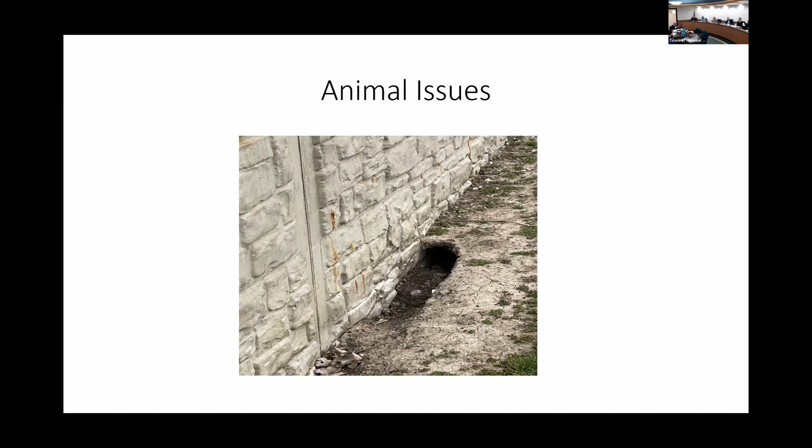The biggest issue here is animal burrowing along the levee. This is just one of many pictures I could have taken—muskrats, moles. So what we need to do is find a company to fill these in, potentially trap some of them, relocate some of them. These walls are driven down 30+ feet in most areas, but over time, if you have some collapses, the whole wall gets exposed. There's our problem person there.

This guy was located off of, that's a muskrat I believe, from all intents and history. So he ends up digging and burrowing down, and then ultimately when the water goes up, his little situation caves in and starts causing deterioration in the levee. This area is right off the Bering Street pump, located just east of Northcott. What you'll see, if you can see the riprap on the right-hand side, that's right where that control structure is.

Unfortunately the Bering Street pump, during high water levels, shoots the water across and erodes the opposite side, which is the Hammond side of the levee. You can see Cabela's in the background. So what we need to do is hard armor that segment so it keeps from deteriorating further. Under high water conditions, you probably couldn't see this—we were very fortunate when we did this inspection. You can see the exposed area more clearly.

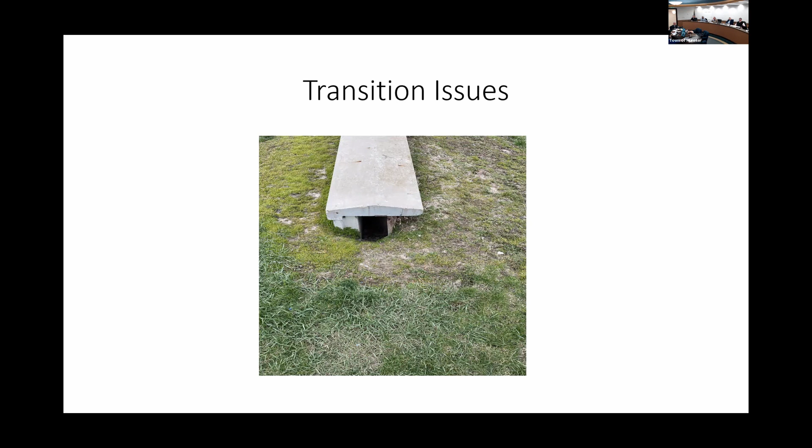Another area we'll address is the transition areas—this is where we go from earthen levee to the sheet pile wall. You can see the sheet pile there a little bit with the cap on top. The earthen levee has settled and gone down a bit, so we need to build that transition up, not only for predator protection but also to help us with maintenance. We've seen a lot more of this year than in previous years, and this is probably the most it's settled.

Stage 7 was particularly identified as an area of trouble. These are the joints—the picture can only do so much, but if you really touch that, it would really fall apart. In stage 7, unlike stage 8, the cap on top of the wall is part of the flood protection, whereas in stage 8 it's considered part of the freeboard, not necessarily part of the protection. So the stage 7 joint failing, and I call it failing, but erosion is more critical.

We've done these in other places, in Gary and in Highland. We didn't anticipate stage 7 to fail this way since it's only 8 years with the joints. So we are going to do that this summer and take care of stage 7, which will just continue on from our 5-2 experiment.

Is that through our contracting or through the Corps? No, this is the original one — we're doing these repairs through us. So all repairs will be through us. Are you doing stage 7 entire, the whole thing? Yes, we're doing all of stage 7.

So stage 7, for everyone who doesn't know, runs from Northcott in Hammond and Munster all the way to Columbia Avenue. This stage is particularly difficult because there's no real access point in and out — it's totally enclosed, unlike other areas where we can get equipment in. This is wall to wall, with a wall running from Northcott all the way to Columbia on both the Hammond and Munster sides. So this is probably one of the more critical ones, one you'll see next month.

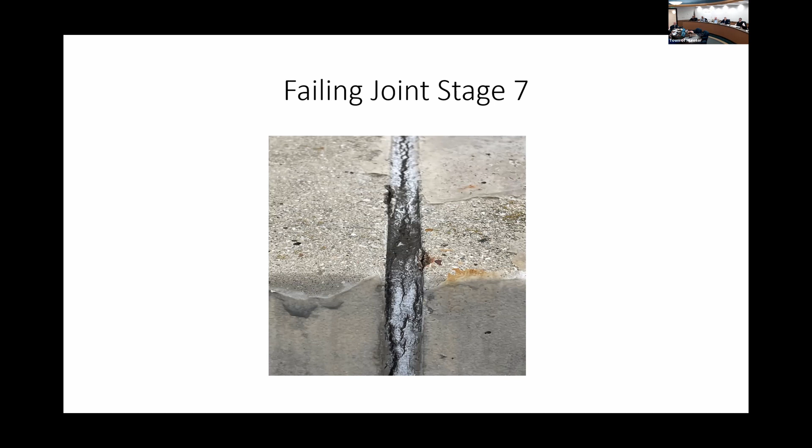So that's the caulk that's failed? Yes. Or we could take it out and test it — you could test it, but we're going to need to come up with an alternative solution, because doing that every 7 years probably isn't going to be very productive.

Once again, this is another settlement situation. You see the brackets there holding up the decorative wall. There's still sheet pile behind that wall, so it's not directly exposed to the river, but it's something you don't want left exposed. Once again, it's an issue of getting a landscaper or someone with a truck to fill that in so it speeds up and you don't see those brackets.

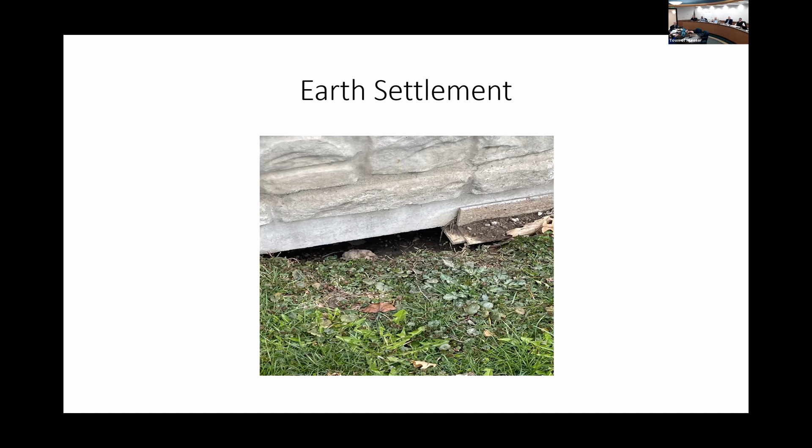And that's part of the problem — this is on the Hammond side, more by the industrial park. We believe it may have been somewhat due to when the young man went missing over there; there were a lot of vehicles up on top. This is an area where we don't normally have vehicles, that's why it's not paved. It's a very remote area and we didn't want vehicles up there, but it seems during that time there may have been more vehicles than we wanted, and over the winter it softened up. But we just need to fill that in, plant seed on it, and we should be in good shape. This is the first time this has ever reared its head.

We're going to get draft copies of all the inspections we did — next week you guys will be able to see them. But I wanted to show you just a sampling of what's out there and what we saw last week.

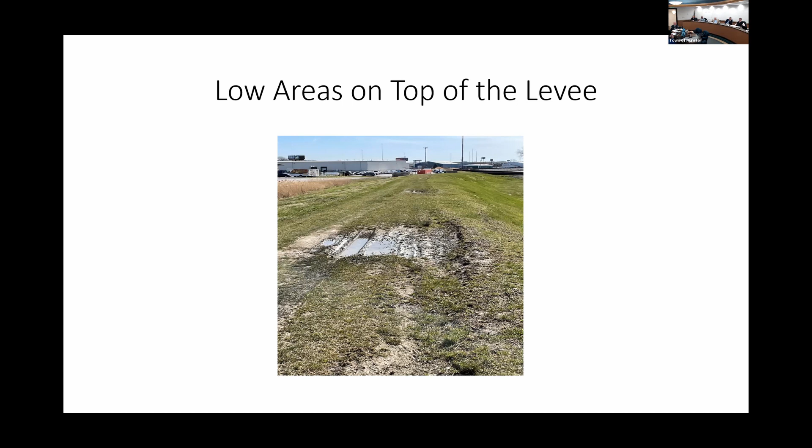And that is it — I don't want to go to that one yet, because that's for the next presentation. Sorry, not too far.

Quick question — was that the Bearing Street pump? Yeah, on the Bearing Street pump. Is that a variable speed pump? I was expecting the line to jump all over this one. You said the pump was shooting out water and it's actually eroding the other side of the bank — that's correct. I mean, that's a lot of force. Can we throttle the pump down?

That drains all of the Wicker Park Estates subdivision, so it's either on or off — when it's on, it's on, just assume it's constant speed. It's a lot of water, and I'll tell you, during a high flow condition you can hear it pump, but you can't see it visibly above ground. There has to be something going on for it to constantly erode, and it's too far away from the diverter structure for the vortexes coming out to be causing the erosion.

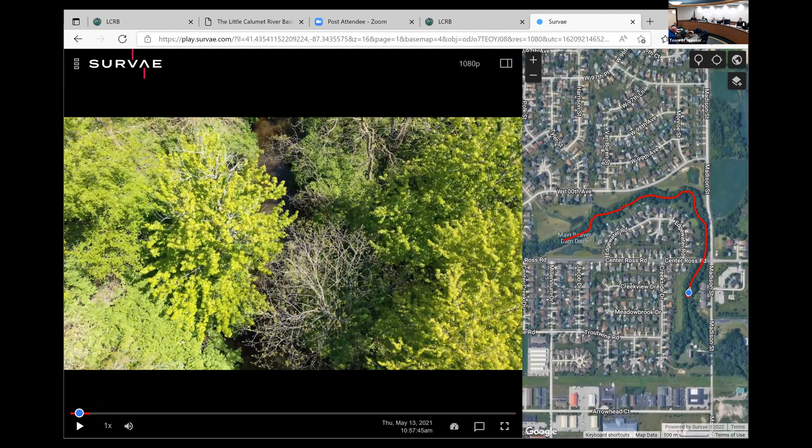Is there enough water there, Bill, for you to be able to get somebody on the water, like in a canoe? Or is this all just computer tech? The modeling is all computer, but the data collection, I think, is mostly going to be on the ground, on the shore, alongside, taking the pictures, taking the measurements.

But you're going to get depths and kind of where the water is supposed to go. The community should have some of that. The premise and the whole thought process with this particular project was to get a cumulative or holistic overview of that entire watershed, so as new construction comes up, the impact would happen, because all the water we're talking about, it'd be nice to see that aerial again.

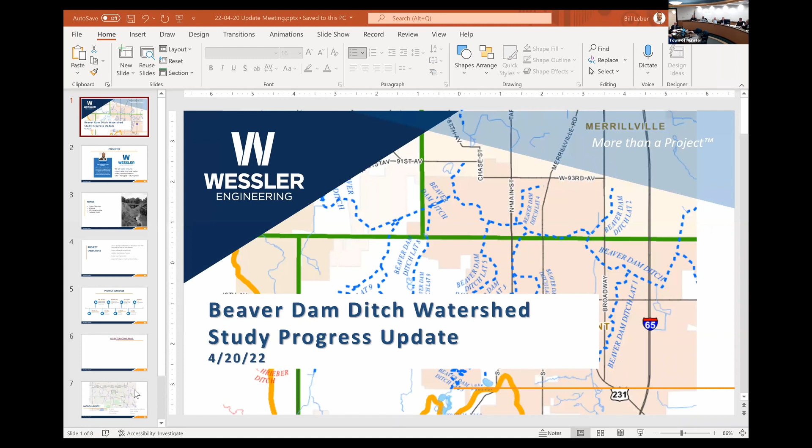All that water, when it's done working through this particular part of the county, goes under I-65 and eventually ends up in downtown Hobart. So this is part of our overall goal of trying to connect all these different portions of the watershed, so one impact in one community doesn't have an adverse effect on other communities. So we have to have some understanding.

It's always been, for me personally, about what's and how much water is going in under I-65 at that one juncture. And all that's happening west of there is construction, and the old stuff isn't getting moved. So we're trying to get ahead of things we're seeing in Hart Ditch, where the volume is so much now after all the development, you have sheer walls in people's backyards.

Right, and that's why it was really important to us that this comprehensive model is both hydrologic and hydraulic. What you've kind of seen in the past, if you're looking at the DNR flood models, those are hydraulic models.

Those are giving you flood stages based on a point in time and a certain flow. Can you explain the difference between hydrologic and hydraulic for us mere mortals who aren't water resource engineers?

So hydraulic is basically just looking at the channel capacity, and if it's at a set flow, what's the elevation in the channel. Usually that's what comes up when there's construction - if we impact the channel and work inside the floodplain, we're changing the cross section, so does that adjust the elevation? That's very important. The difference is we're not just looking at the geometry of the section and the channel, but also the amount of runoff.

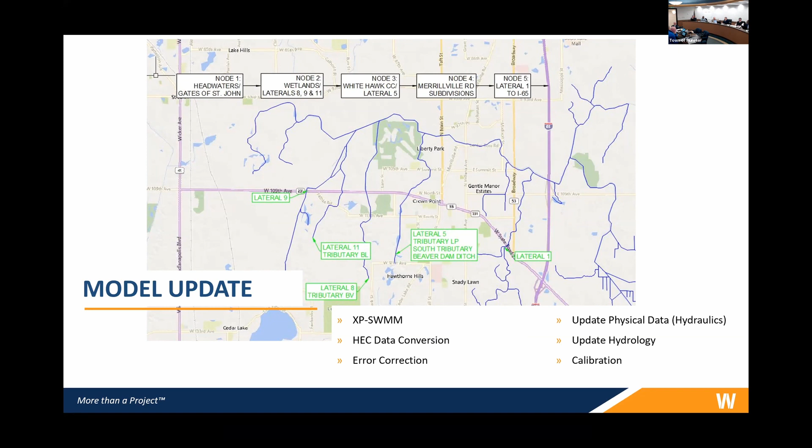Okay, thank you. Thanks. Anybody else? Going once, going twice. Thank you very much.

Next up, I'm going to change things up. Is anybody here from the city of Hobart? Could you do a presentation regarding the interlocal agreement on Stinky Creek, Turkey Creek, Lateral 6, the Region Regional Stormwater Watershed Project?

Holy cow, do you start every meeting like that? With that whole name? We try to. State your name and address, sir, please.

Phil Graylick, City Engineer of Hobart. Our address is 414 Main Street, Hobart, Indiana. Thank you.

Please tell us what you're recommending with regards to what we had already approved. I think there was 400 and some change as it relates to that job. So it's my understanding you're looking to have some modifications to what was originally discussed.

Right, we had applied a couple of years ago for what we saw as our solution to the Stinky Creek problem, which was basically to enclose it in a pipe and alleviate the flooding within Hobart. We hired Abonmarche and Christopher Burke to design that.

In the early preliminary phases, they came up with the idea of taking it to the north, and we came back and asked the commission to consider funding the design of both the Turkey Creek Lateral 6, which is the blue line on the handout, and the Stinky Creek line, which is the black line. The commission said no to the Turkey Creek Lateral 6, but agreed to fund the engineering, partnering with us for the interceptor sewer on Stinky Creek itself.

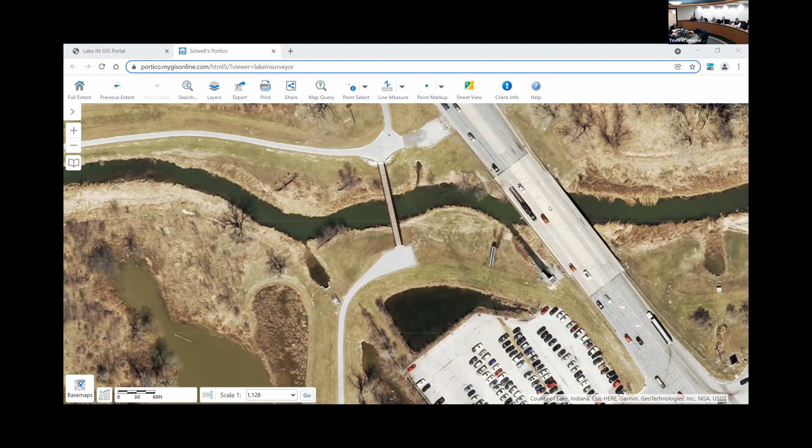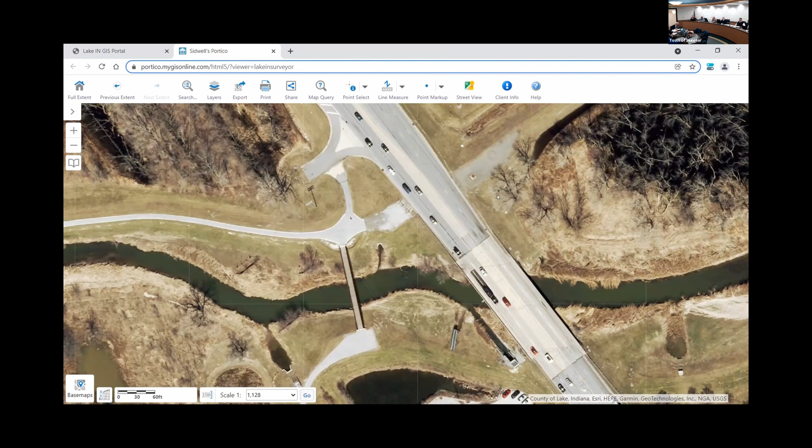Mr. Repay: I'll start off with this and then I have pictures that are better. This is the aerial view. Indianapolis Boulevard is on your right. This project consists of two things, separate but in the same area. One is to improve the gates in the area. As I told you in the inspection, the gate that failed is right here. There's the truck stop over here. This is technically Highland. This gate is built basically at ground level, much different than all the other gates. You'll see what a typical gate looks like in this system in my pictures, but first an overview. This is the outfall from the INDOT pump station located here, which will prove important later.

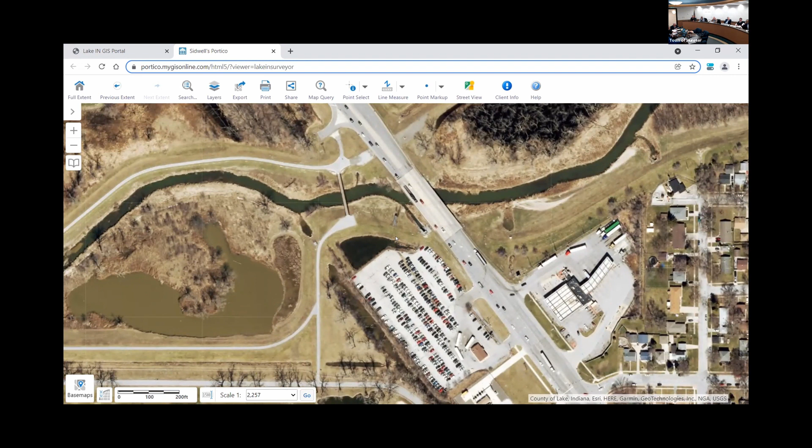This is a green pond I get told about every summer when it turns green because there's no water flow. This pond was designed to drain this parking lot and ultimately drain through this area. The problem is there's not enough flow in this area to push the gate open, and this is the plank. Those who have been around know the secondary closure at this area requires us to go out on this plank and drop sandbags down to prevent water from backflowing, so it doesn't flood in this area.

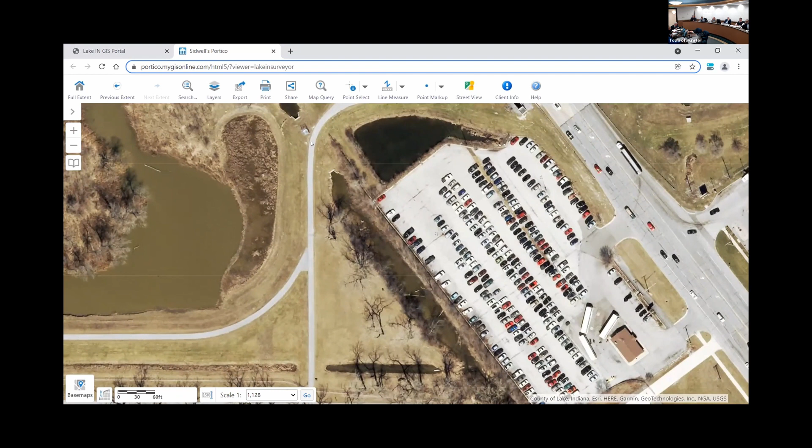That's another component. The second component is this gate, a typical gate, you'll see a better picture later. It's supposed to drain this little drainage stream, lack of a better word. Once again, not enough pressure to push this gate open. You can already start seeing the sediment filling in this channel. Ultimately all this water makes it anyway to the inlet of the INDOT station.

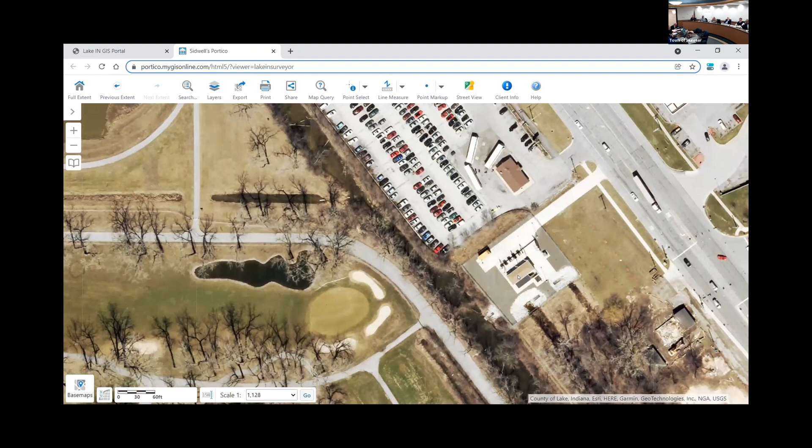So this contract will address those issues as well as the issue with the pump that Wicker Park puts here to pump water off the golf course during high flood rain events, which it's designed to do. It's supposed to take the water, but during times when we need the water off and don't need the storage anymore, they pull off this old 1900s pump and it pumps it back into this ditch that ultimately feeds into the INDOT pump station. United did the pump station, they know the amount of capacity available, and that's why we chose them.

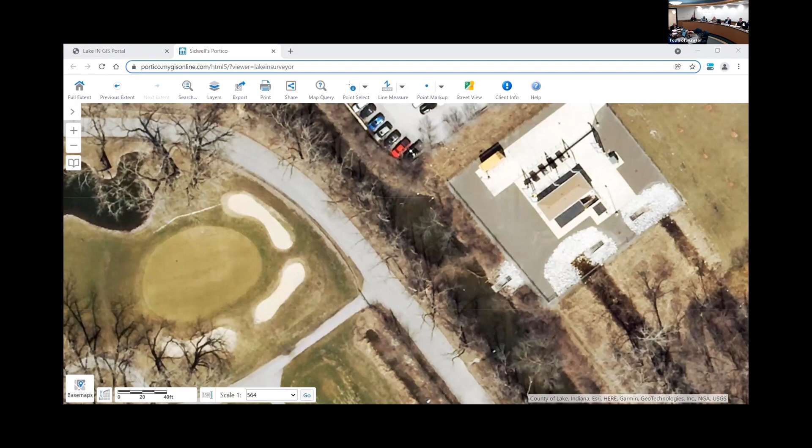Oh, I gotta get out and stop sharing and share. Sorry Bill, I'm gonna get to it. Darn it, yeah, you're laughing. I get it, what do you got?

Mrs. Lambert, can we send you to like a seminar to maybe assist in this type of endeavor since this has been a consistent thing? I think we can do that. I'm under a lot of pressure. I know, and we can't expect you to do everything, inspections and all this, and the screen sharing too. I couldn't do it. So here's.

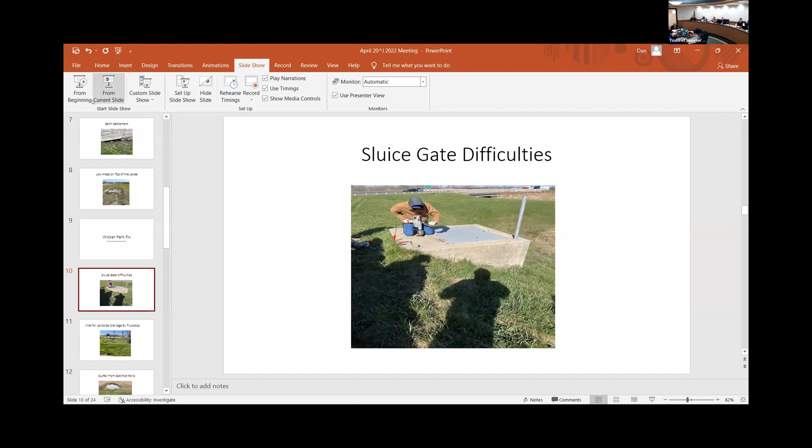I'll just zip through here because you've already seen these. So here are the gates that I spoke about. This is the gate that you saw the aerial, that is ground level, the one that failed this year.

They're going to extend this above ground so that you use the tripod, we are at ground level or above ground level where we don't have to have people doing this type of work. There are only two others consistent with this.

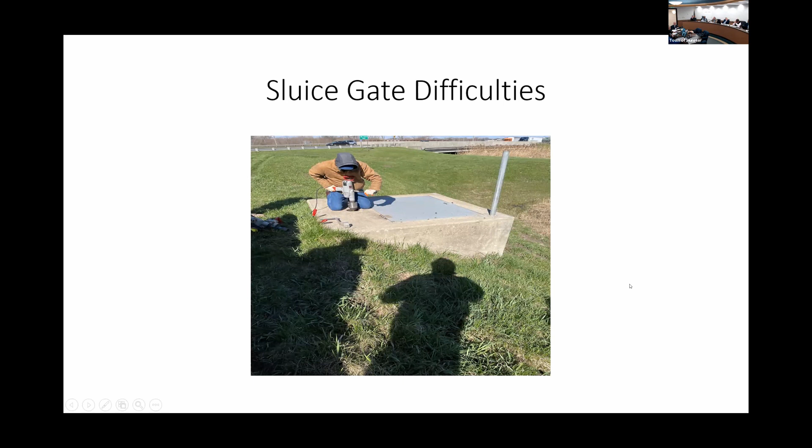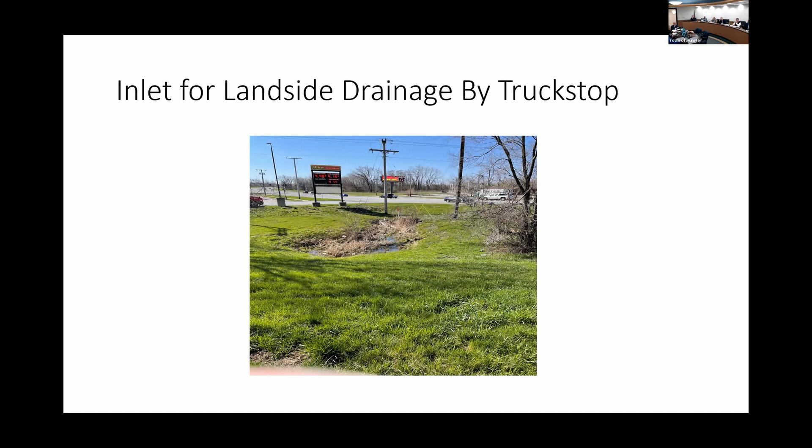That is the area that it drains. I apologize for my finger slightly being in the frame, I'll work on that in future. That's the truck stop, you are looking southwest from that location.

This is the other gate that they're going to fix. This is the manhole that drains from Optimist Pond into the river. You are looking at the river.

That is the manhole. The secondary closure for that, meaning in the event that water starts coming from the river back into Optimist Pond, flooding the hotels, Cracker Barrel, and everything else, our instructions are to lift that manhole and throw as many sandbags down that chute as possible.

Say that again. That's what's in the inspection manual. That's what we're supposed to do. Pop that off and drop sandbags down there until it stops? That's correct. Oh, okay, great.

So, and this, in the rain by the way, this has backflowed in the past. As a matter of fact, in '08 it did, but we've made sure we've cleaned it properly.

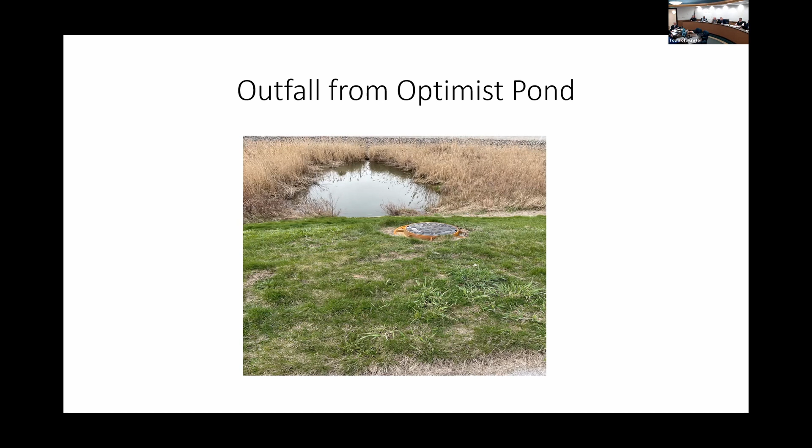But if we're going to address it, they're going to build it above ground. That's the number one part. They're going to fix the sluice gates. So those two sluice gates are going to be designed under this contract.

The second part is the draining component of it, which will correct a lot of issues in this part of the area. That's the pond that all water runs to on Wicker Park, off the 6 hole Wicker.

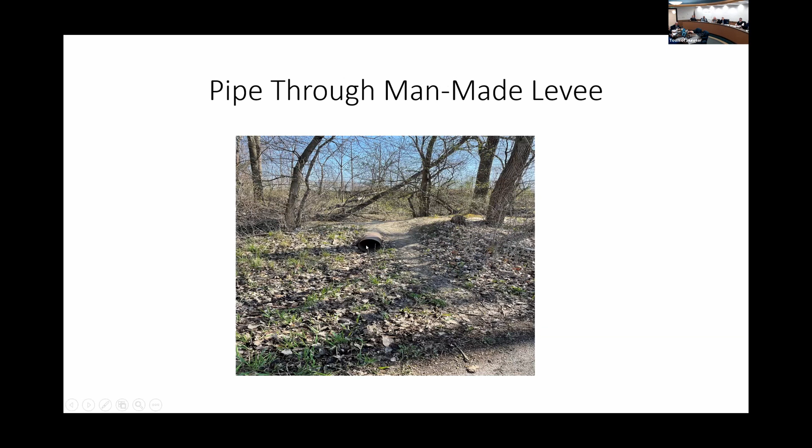This is the service road around Wicker. To the left is the levee. Just to give you a perspective, you were looking east. You can see the pipe that they've embedded now into a man-made levee that they built so that they can connect it when the water gets high.

And you can see in the distance, right here, that's the other connection that they use to ultimately connect to this pipe. This is one of those things that you address when you have time to figure it out.

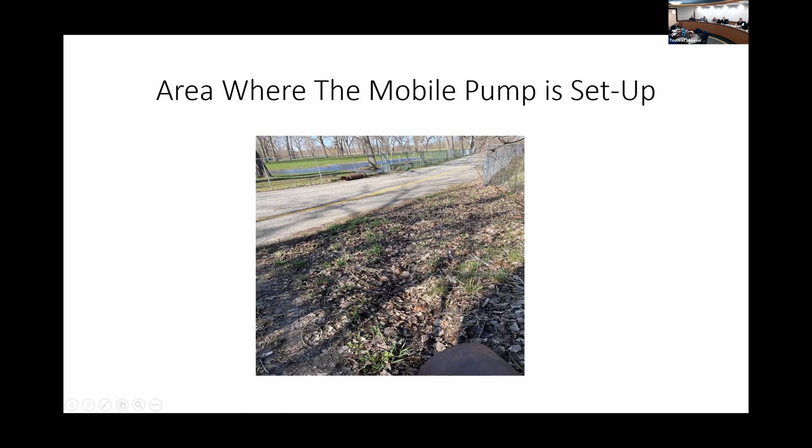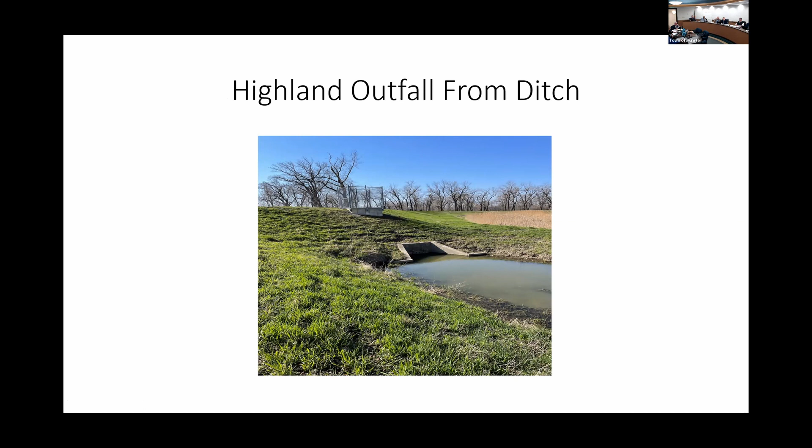And it gets covered with Phragmites every summer. And here's the landward side.

You were looking dead south down the same ditch that Wicker Park puts the water into. But ultimately, all that water does not make it to us. It makes it to the pump station and ultimately will make it to us.

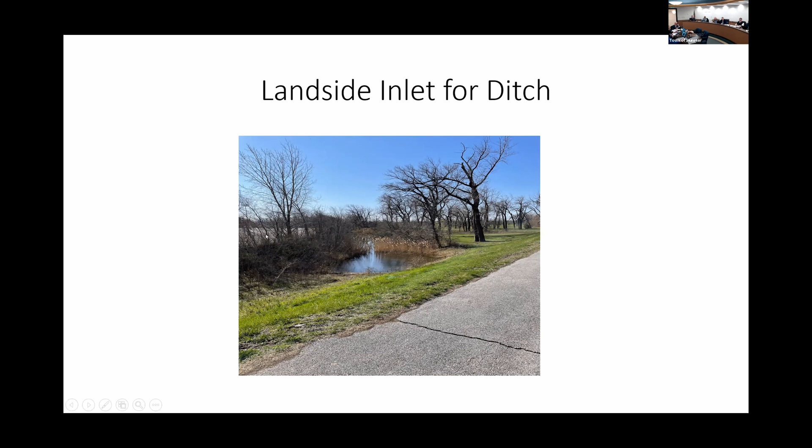You can see on the far left here is where there's a sheet pile wall. It has now been overcome with some trees that prevent the water from the little pond from making it into this area. Because that sheet pile exists, you can see it better here, and again over here, this pond can't get to that ditch.

So what the design called for was for it to flow back into the river using gravity. And that's the plank, what we call it.

That's the worst thing ever, right? Well, that's just what we have to call it, I don't know what else to call it. No, that structure, I thought it was a fishing pier. You go to the end with sandbags and drop it in a hole like that, like the game with the milk bottles and the clothespin.

The chairman is correct. In the event that water starts backflowing into this area, we go to the end of this structure and drop sandbags to close off the flap gate from backflow.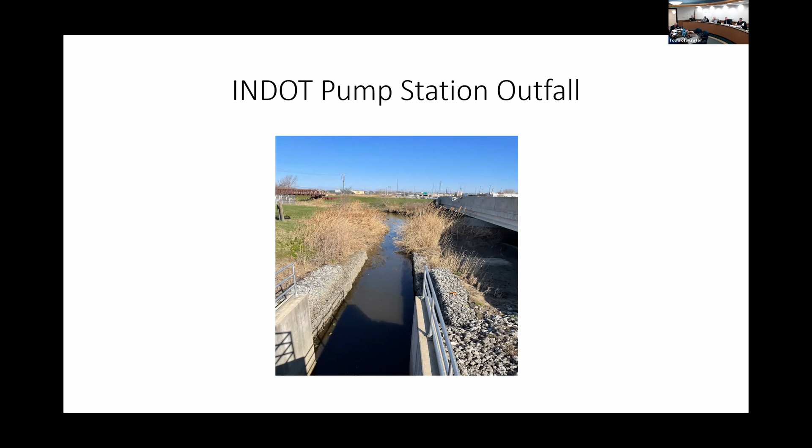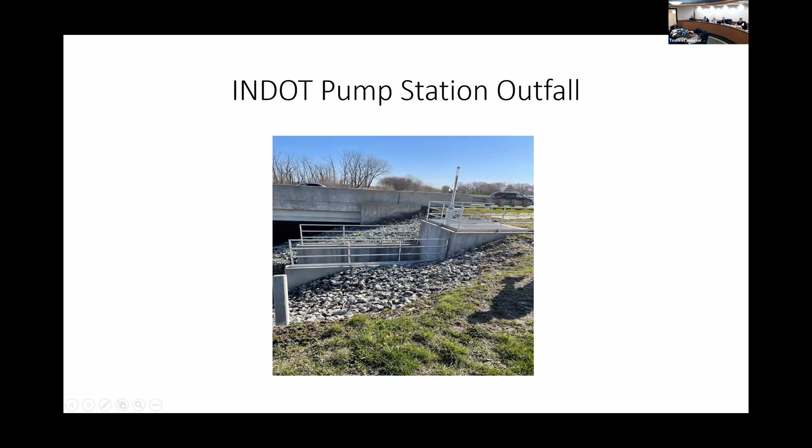It's clear, although the Phragmites are still a little thinner, but it's hard armored all the way down. The station has plenty of capacity. We would need to put a fence around it so someone doesn't go play around with the stem here. But other than that, it's a good outfall, and that's ultimately what this contract is to do, is fix this area.

Oh God, it's showing. No, it doesn't. I have to stop sharing again. I'm trying to figure out how many of these we've done over the years, and this has got to be double figures. All right, anyways, so this group, got- are you talking? I'm done, okay, done playing around with my mouse here.

So United Consulting, they did the INDOT pump station, because that was only about 5 or 10 years ago, how many? So they know about the capacity.

My whole point is that if we do all of this, is that large enough? I'm sure it's over-engineered, but just to ask the question, is there enough capacity there? There is enough capacity. And from what I was told, the initial contract was going to take into account what we were going to do, but they sort of just ran out of time. That's my words, not theirs. And they didn't want to necessarily address it.

Now with our knowledge of how this thing works and how to correct it, we can take out two of those openings so that we potentially don't have to drop sandbags down or anything else, and we move everything to a pump station, which already exists. Highland manages that pump station for INDOT. INDOT pays Highland to manage that pump station, so we know what kind of working condition it's in.